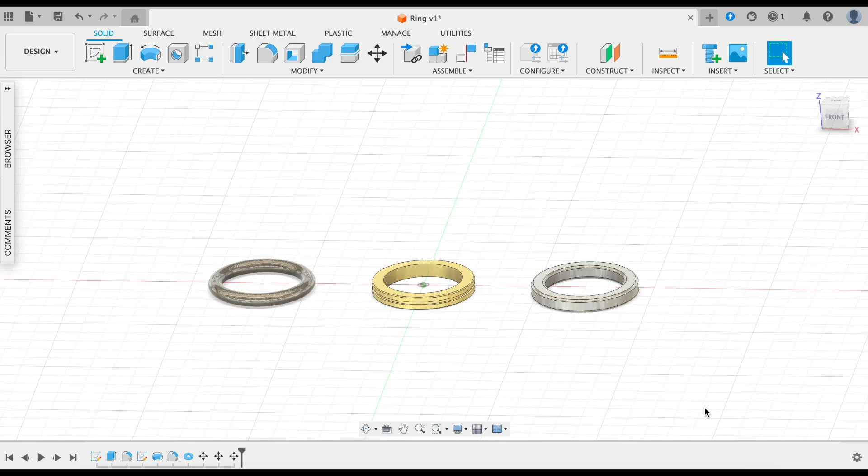For today, I'm challenging you to make your own original ring. What you can do is pause this video here and use Fusion 360 to try to make a ring of your own. Feel free to explore and make it any way you like. Then you can come back and check in with us. I will show you 3 ways to make a ring. Let's get started.

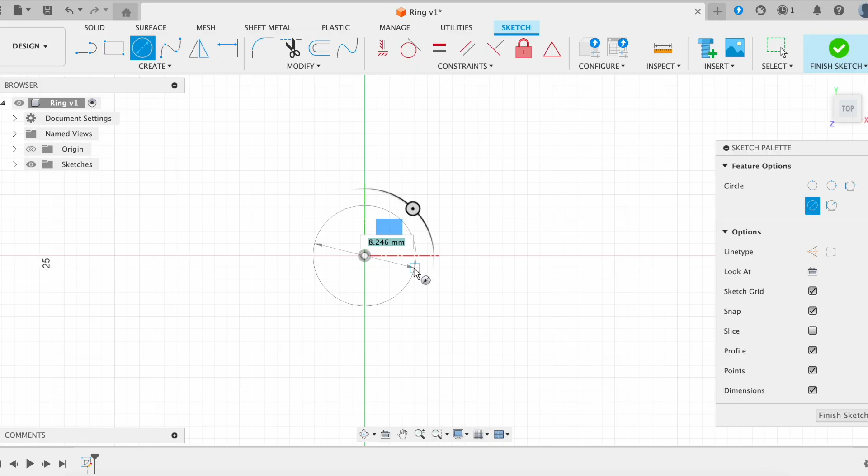Now, for our first solution here, as many of you may have thought of, we can use our extrude tool. We'll start by drawing a sketch. You may have gone ahead and used the circle tool to create 2 rings, like this. Pair it on the center, and of course you would have dimensioned it. And you may have gone ahead and extruded this whole shape.

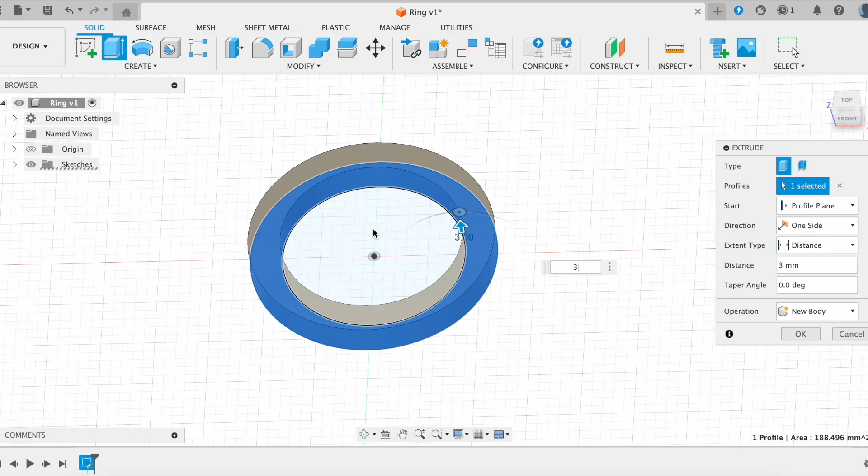As an extra step, what you could have done was fillet these edges. Go ahead and select the bottom ones as well. And that would give you this nice ring shape. This is a perfect solution, and it draws on some of the tools we learned from the very beginning, such as the extrude and the fillet tool.

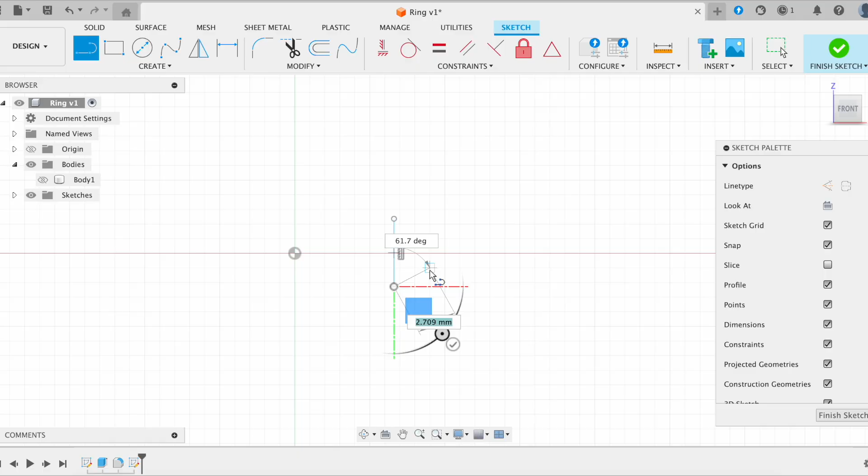For our second solution, what many of you may have tried would be to use the revolve tool. We could go to the front face and draw in the side profile of the ring. In this case, we could also make it have a bit of a design by taking out these line shapes and making an interesting cutout like this.

You'll see here I've used a couple of constraints, including the horizontal and vertical constraints, the equal constraints to make these 2 lengths equal, and also the collinear constraint to make sure that these 2 lines stay right on top of each other.

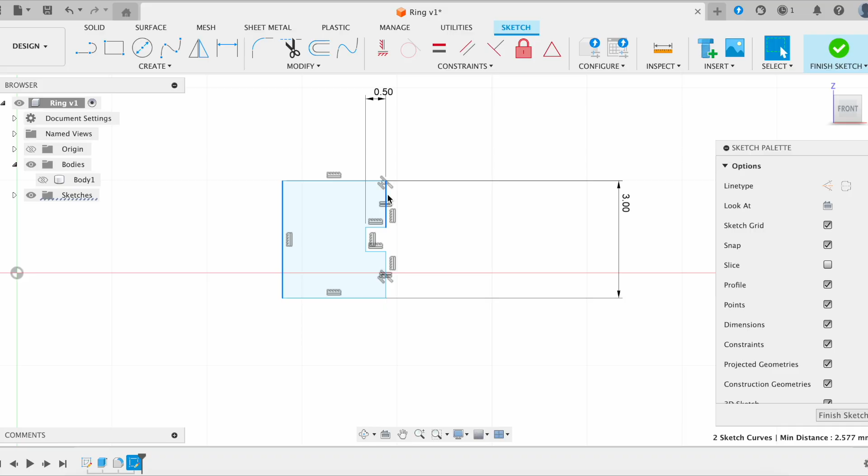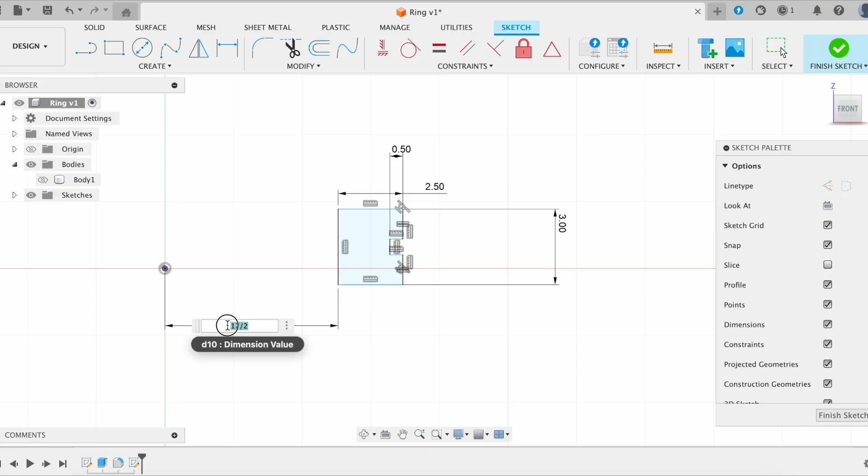Of course, you'll have had to dimension this as well. Here for this dimension between this shape and the center, we would have had to choose half of our ring diameter. I'm using 17, and in this case, since we want half, we can just go ahead and do 17 over 2 here, and it'll do the math for you.

You could have also lined this up to the center using a line like this and snapping it to the midpoint, and also making this line straight. However, it's also not a requirement since we're just going ahead and revolving it.

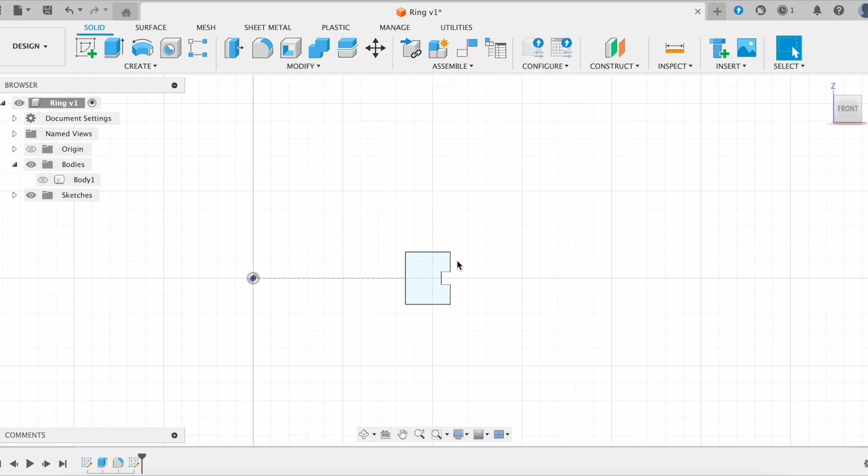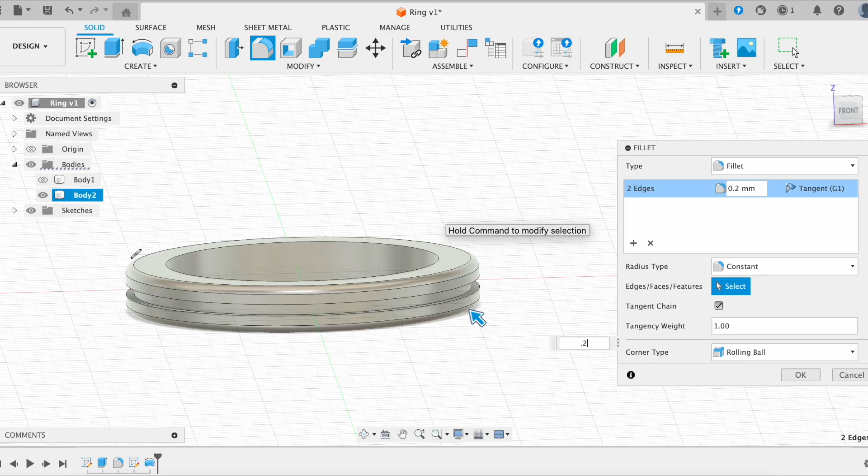So you would finish the sketch and you can revolve, selecting this middle axis. This would give you more of a ring with like grooves and other designs, and of course you could go ahead and fillet any edges that you wanted to clean up a little bit, to get this nice shape. So there you have it, our second solution.

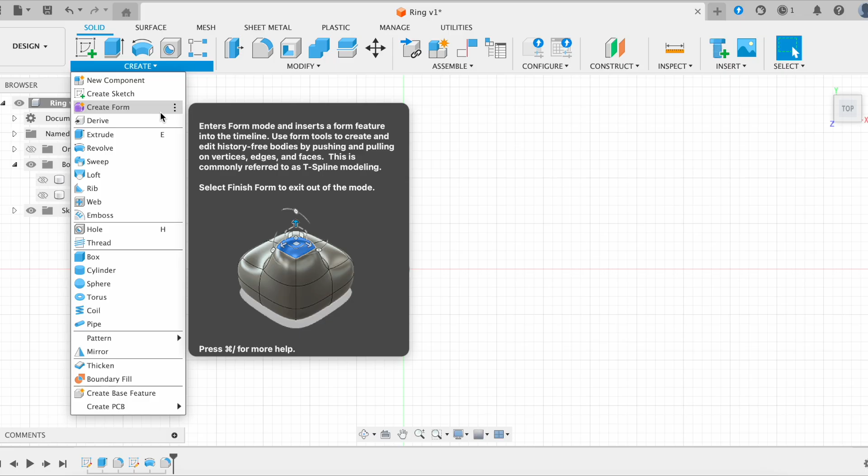So for our final solution, I'll be showing you how to use a new tool. Upon first hearing the challenge, what many of you might have done is to look at the Create section and see if there's any other tool you can use. This is a good tip since it's difficult to learn all of the tools all at once, and every time you find a new project, you might be able to learn how to use a new one.

So we'll see here there's this torus tool that seems to make a ring shape. We can go ahead and use that. So I'll show you how to do that. We're going to go ahead and click this top face. It can be any face. And you'll click the center and you'll drag out and choose the ring diameter.

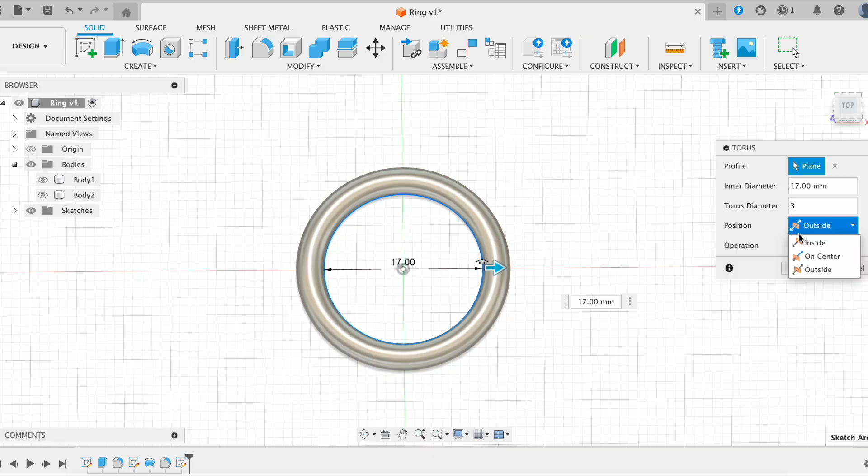I'm going to do 17 as always. And we'll also see you can choose the torus diameter, so how thick your ring is. And I'm going to go ahead and do 3. You'll notice the position might be different for you, so you could have it on the inside, where your ring is drawn on the inside of your diameter that's 17, or whatever length you chose, or you could have it on the outside, or on the center. Since I know my finger's about 17, I'll want to put it on the outside.

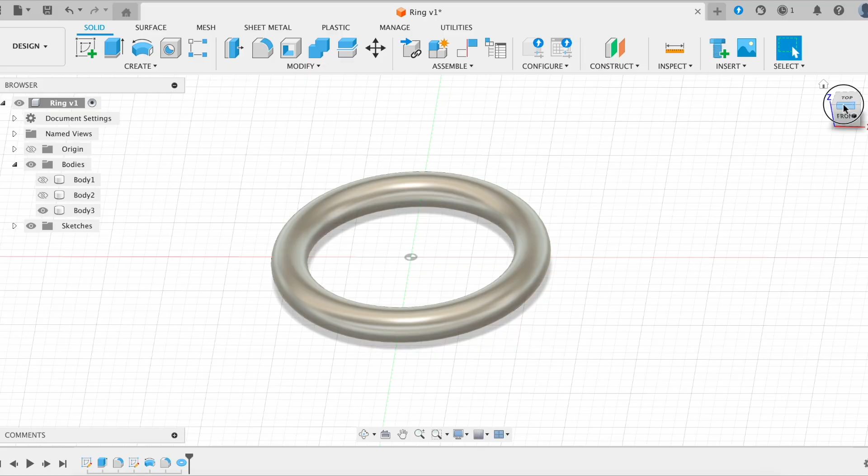And we'll click OK. This is a perfectly good way to make a ring. It is a little bit more difficult to customize, but as we get more familiar with the program, we'll also learn how to make engravings into curved faces like this as well.

If you made it this far, great job coming up with your own solution to making a ring design. As always, there are many more ways to make rings than this, so feel free to explore.